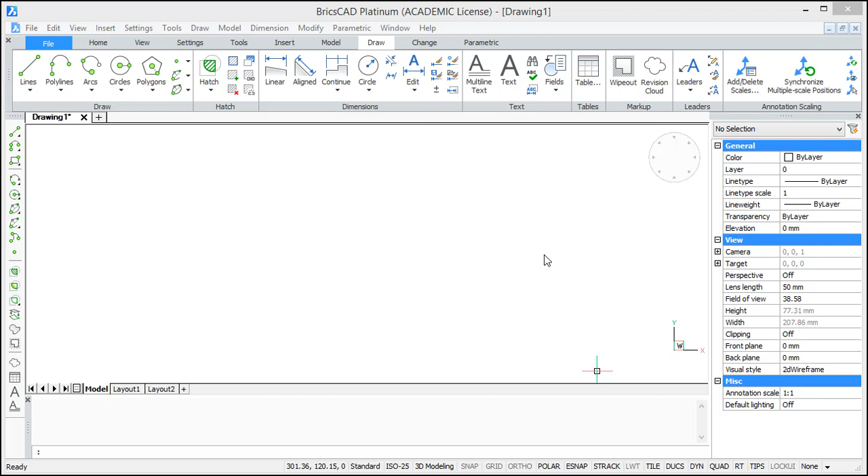Let's start with the head. Draw a polygon from center to side and choose a radius of 24.

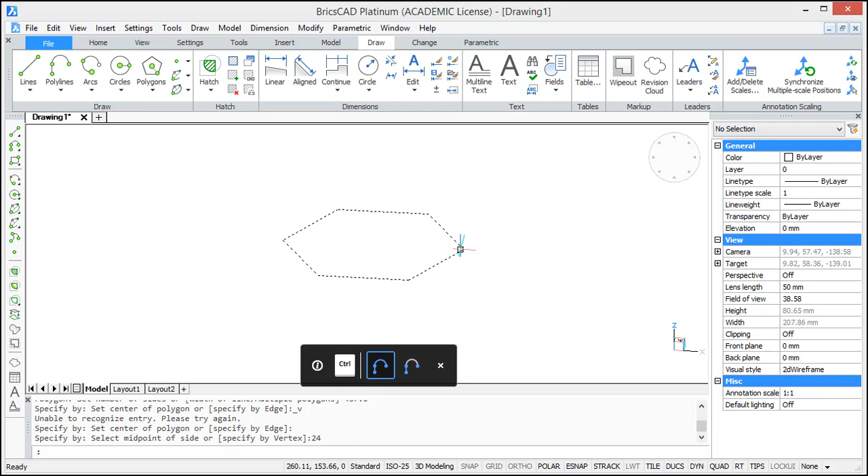Now we need to extrude this polygon. So select it, select extrude, and pick a height of 24 units.

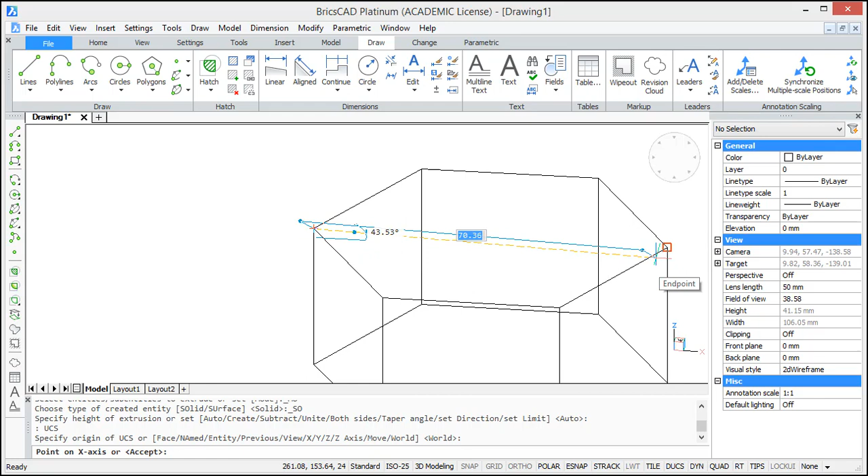To create a cutoff edge at the top, we are going to draw a triangle at one of the hexagon nodes. To make sure this triangle is oriented well, we are going to move our coordinate system so the XY plane is vertical. For this, type in UCS, select the x-axis and y-axis.

Okay, so now you see the orientation of our coordinate system has changed. Select polyline and draw a triangle.

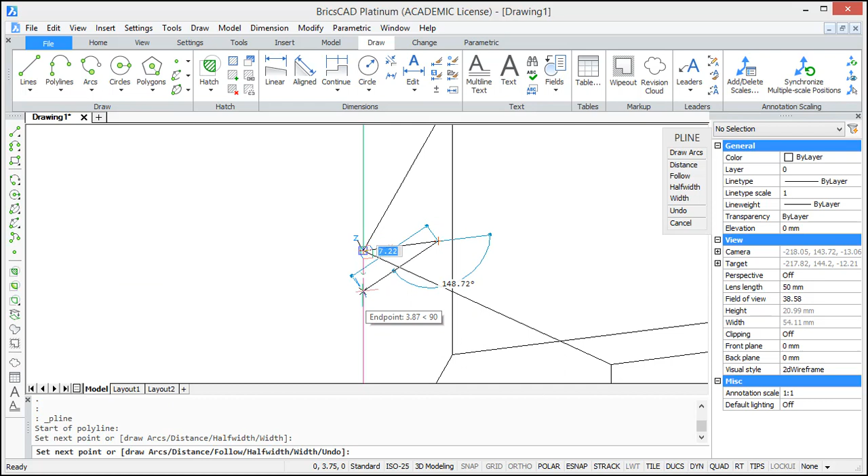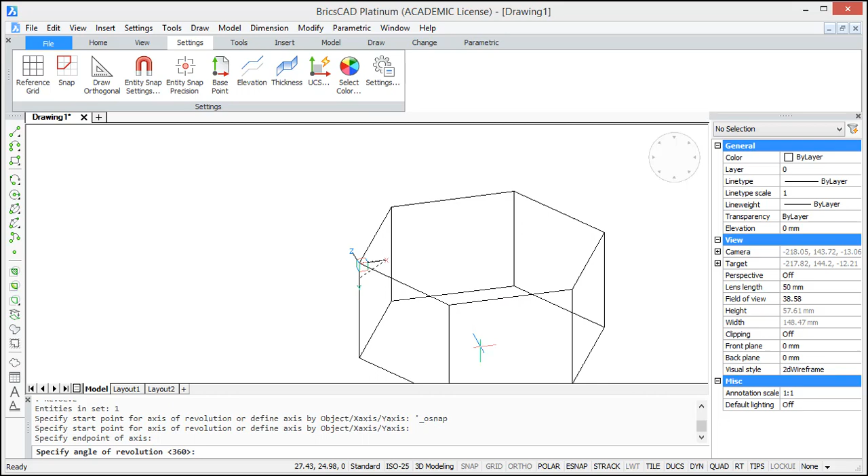This triangle now has to be revolved around the center axis of the polygon. So type in revolve, and to select the geometric center, enable it in the snap settings. Then select 2 points on the axis, press enter, and it is revolved.

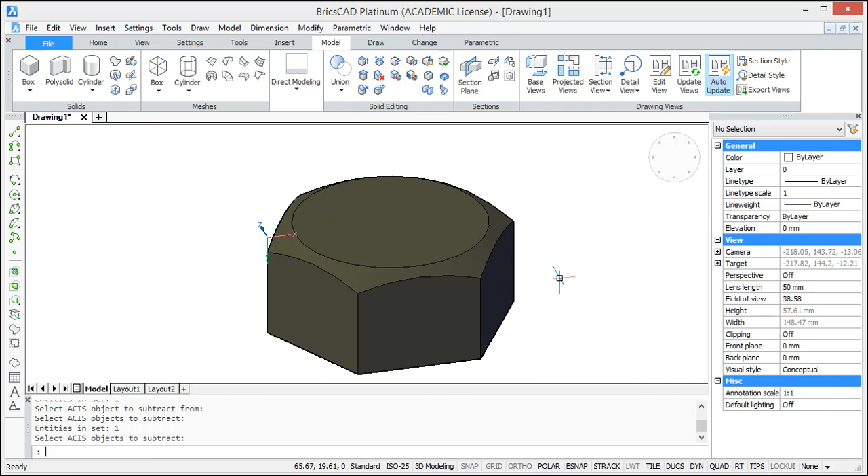Now this new solid has to be subtracted from the existing solid. So for this, go to subtract, select the existing solid and our new solid, and then you get the final shape of the head of the bolt.

Okay, to create the shaft, we are going to draw a circle on the bottom surface of this head. Take a radius of 12, and then extrude this circle. For this, pick the height you want.

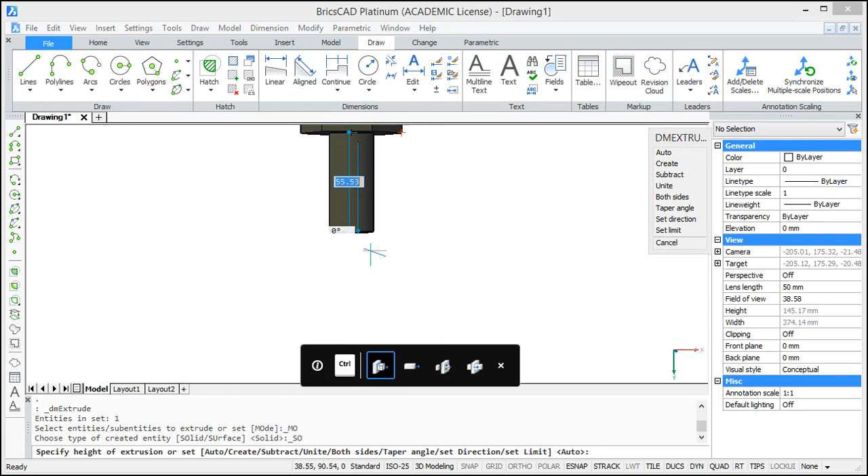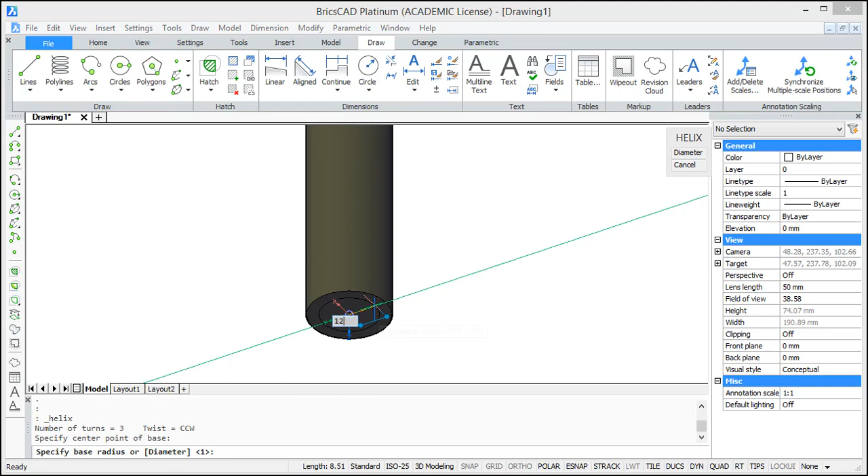Okay, now we still have to create the thread of the bolt. For this, we are going to draw a helix. So under polyline, you find the option helix, select it, select the base points, the base radius, which is 12, and the top radius, which is also 12. We are going to set our turn height at 3 millimeters.

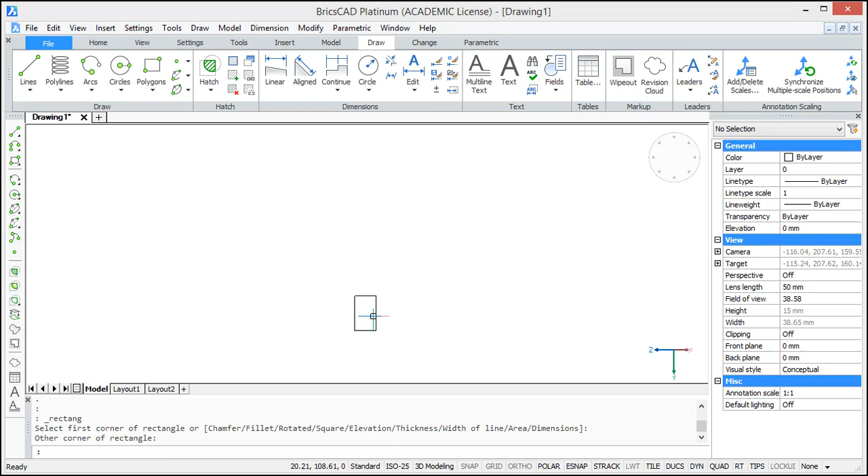And then just move your cursor to the height you want the helix to be. Now we need to sweep a little square around this helix, so draw a square of 2 by 2. Then type sweep, select the square, press enter, and then select the helix.

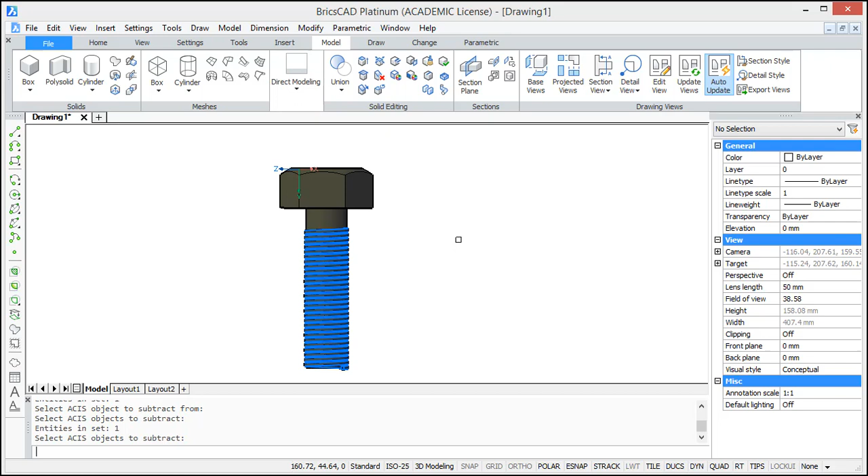Okay, so then you get something like this. Now we still need to subtract the helix from the shaft. For this, go to subtract, select the shaft, press enter, and then select the helix. And like that, we get our final bolt.

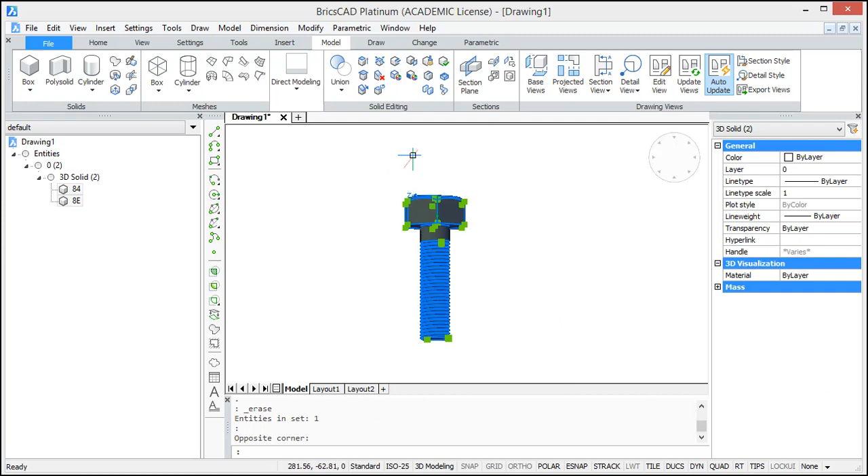Now we are still going to take a look at the structure tab. So do a right click and select structure. Then we see the helix is still in our drawing, so we are going to delete it. And then there are 2 solids, but we want 1, so we are going to union these solids. Okay, so now you see we have 1 solid.

And here's a quick look at our final bolt. Thank you for watching.